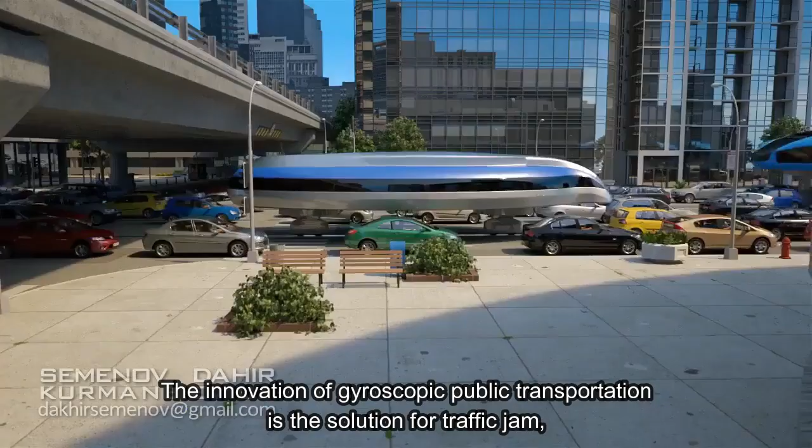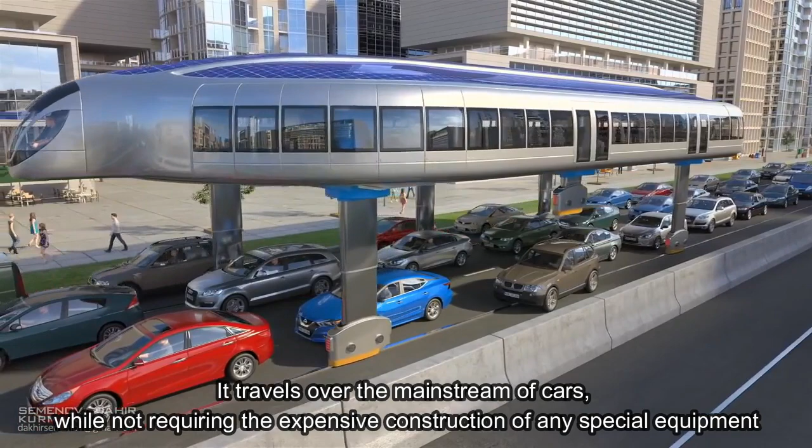As the number of cars in the cities has increased every year, traffic jam has become one of the biggest problems in today's cities. The innovation of gyroscopic public transportation is the solution for traffic jam. It moves along the same common roads, traveling over the mainstream of cars, while not requiring expensive construction of any special equipment.

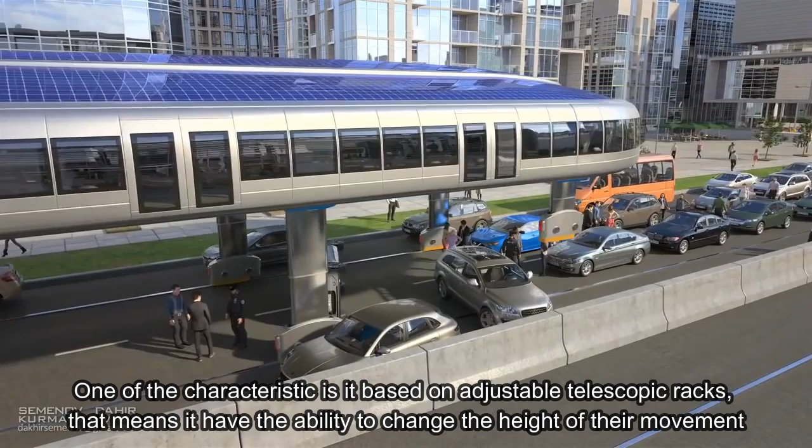Moreover, these vehicles have many other characteristics. One characteristic is that it's based on adjustable telescopic racks, meaning it has the ability to change the height of its movement. Therefore, these vehicles can travel above high trucks and pass under a bridge.

Next, we will present to you the abstract, motivation and background, problem statement, model, discussion, and expected contribution of this transportation.

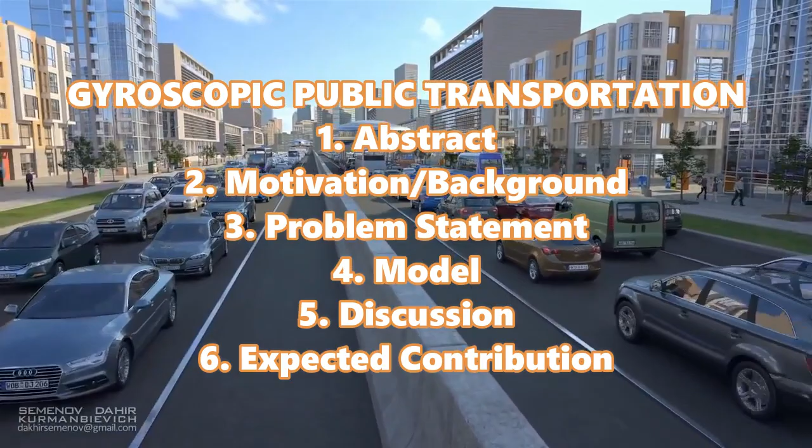Research aims to assist others in saving time and money while still being environmentally friendly. Motivation for this mode of transportation is to alleviate the issue of massive traffic and pollution. Gyroscopic public transportation will reduce air pollution. Using electric energy to support its operation also helps reduce resource consumption, especially fuel. The country will advance to a higher level and people's lives will improve once the gyroscopic public transportation is successfully built.

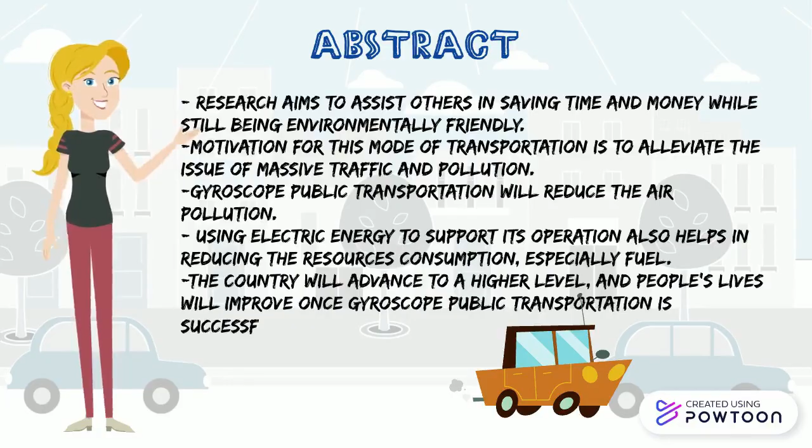Now I'm going to talk about motivation and background. Transportation is critical to urbanization because it connects people to careers, schools, industry, entertainment, medical care and other services, as well as defining social ties. The importance of transportation and population mobility has grown in recent decades. Cars have been the prevalent form of transportation over the last half-century, with the consequence of increased congestion and pollution.

The concept of innovation is a contemporary idea, a novel idea of improving something in a more efficient way. Innovation is critical in business and economies, like in technologies and transportation. These advancements have paved the way for autopilot system technology, which aims to minimize collision, energy use, emissions, and traffic congestion while also increasing transportation accessibility.

As a result, the concept for the breakthrough leads to establishing a new transport technology, which is gyroscopic public transportation. The concept is to provide a mode of transportation based on a floating platform that travels around the city and is driven by an ample mass connected to the road. It is solar powered and runs on electricity.

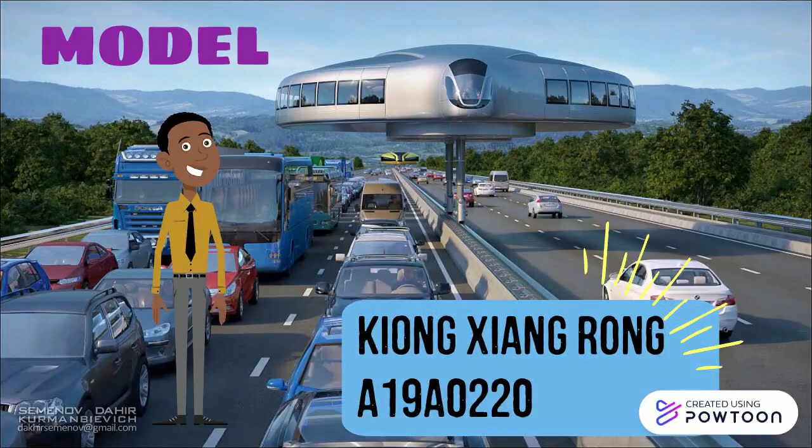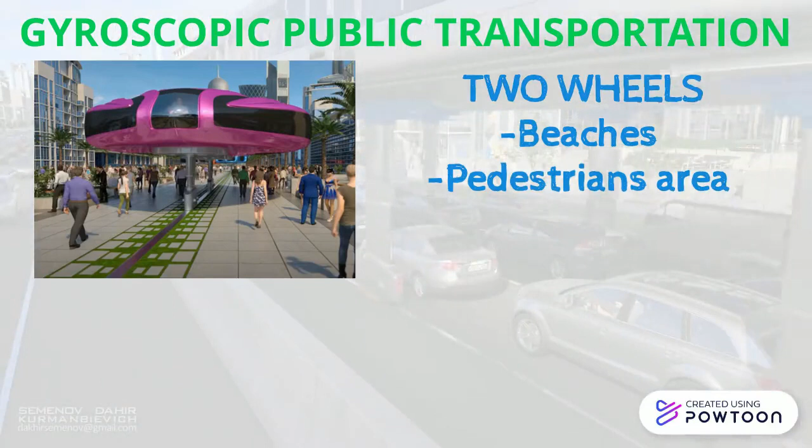There are two types of gyroscopic public transportation. The first type is with two wheels. The two-wheel vehicle is suitable for use in beaches or pedestrian areas because it can pass through narrow spaces. The second type is six wheels, and the six-wheel vehicle is suitable for use in city routes or highways.

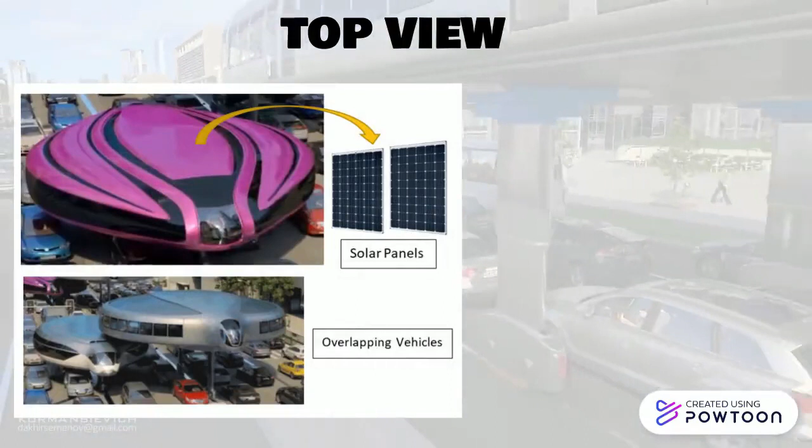The two-door innovation of this vehicle is better than one door because it separates the passengers going in from going out, in order to save time.

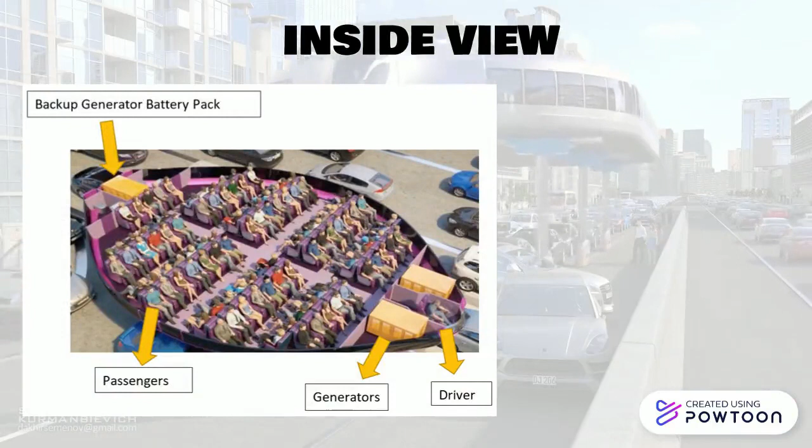From the inside view of the gyroscopic public transportation, there are the driver, battery generator, passengers, and also backup generator. The maximum number of passengers of this vehicle is 200 seats.

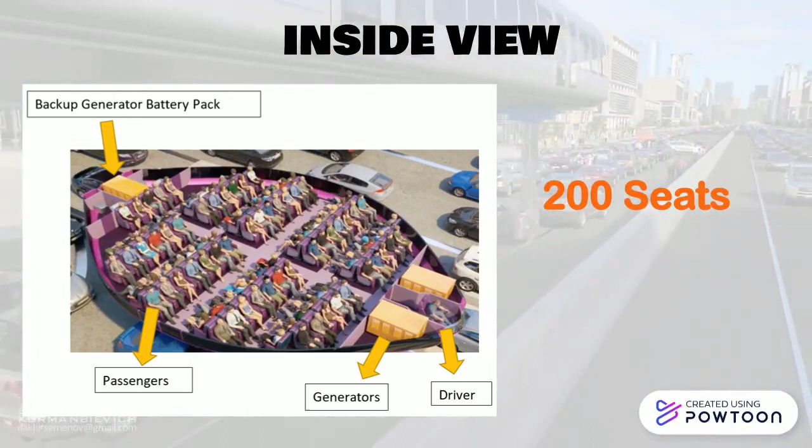There are two battery generators in front of the vehicle that will generate power during night or situations like raining. Beside that, there is a backup generator battery pack behind the vehicle to prevent issues if the main generator runs out of battery. Lastly, I will explain the bottom view of the gyroscopic public transportation.

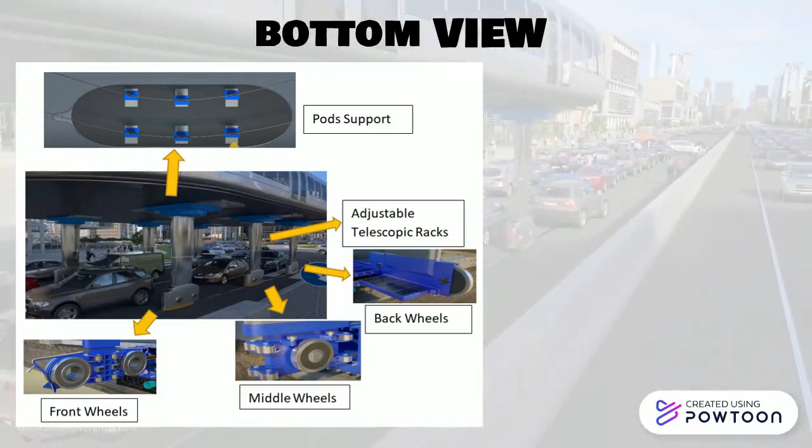The bottom of this vehicle has the pods support, adjustable telescopic racks, front wheels, middle wheels, and back wheels. The pods supports are stored on 6 adjustable racks that can lower or enlarge the height of the vehicle based on the traffic situation.

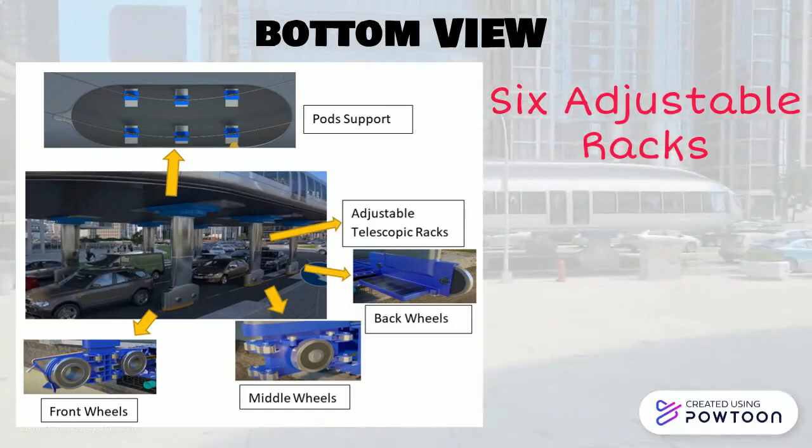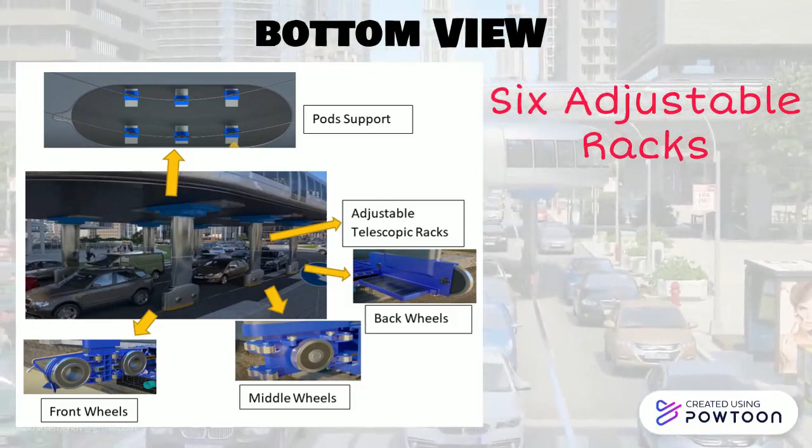For example, when the vehicle is passing through a tunnel, the racks can be controlled to lower the height to avoid crashing. And when the vehicle is passing through a high lorry, the adjustable rack can be made higher in order to pass through the lorry.

The whole structure is balanced on a gyroscope that can pass through traffic with flexible movement. Gyroscopes are usually used in aeroplanes or spaceships to maintain their alignment.

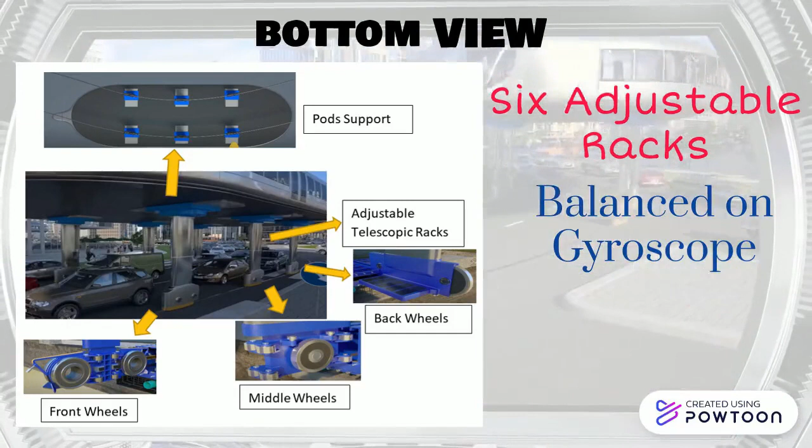The adjustable telescopic racks are able to sense the route's environment. It can travel routes with different radius of curve, intersections, and traffic jams. And lastly, for the wheels part, there are front, middle, and back wheels to support the vehicle to flow on the steel rails. Thank you.

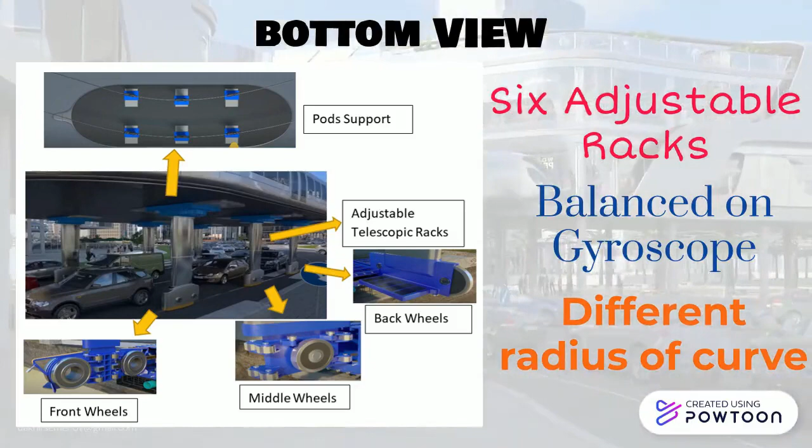There are a lot of benefits that gyroscopic public transportation brings to the logistics industry. This is because it can achieve time saving and a green environment. Gyroscopic public transportation is powered by electric and solar energy so that it is able to reduce the use of petroleum in order to achieve environment awareness for everyone.

Second, gyroscopic public transportation has highly reliable arrival and departure times. This is because the logistics industry always aims for just-in-time, or JIT. Gyroscopic public transportation moves at a right height that goes over cars on the road, so it can prevent traffic jams and road obstruction while delivering parcels or goods.

Besides that, gyroscopic public transportation has less need for warehousing and fewer materials and goods in stock. It has a big room space that can deliver goods at the same time and has quicker transit times. This less need for warehousing helps logistics companies save on rental warehouse costs due to less use of local warehousing.